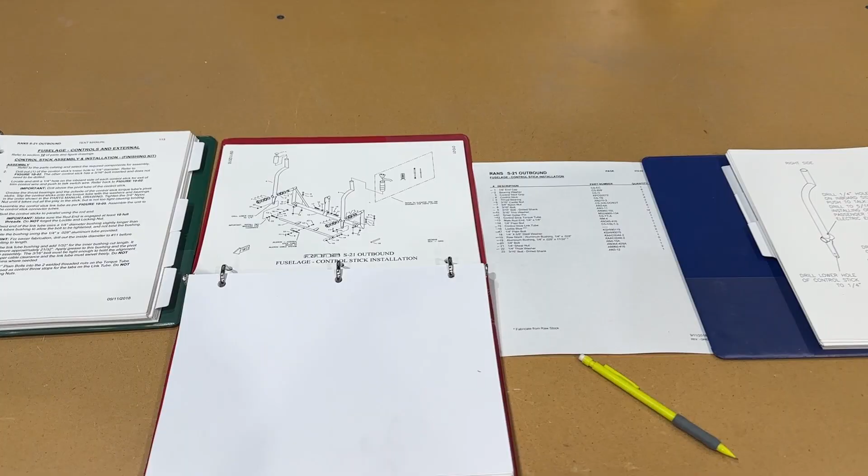Today I'm going to work on the control stick. I'll probably work on the rudder pedals too, but I'm going to start here with the control stick assembly. I've got my parts manual laid out, my text, and the figures manual. Looks like I'll have to reference a couple figures for this. I've gone through my parts listing and gathered up all my parts here.

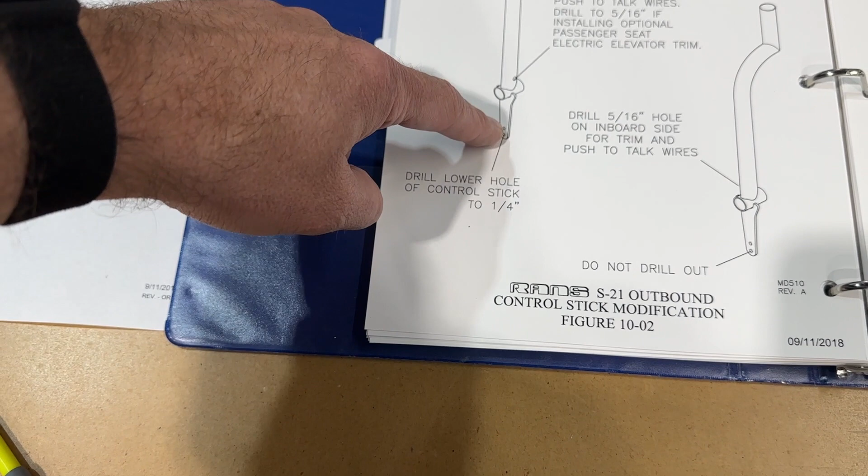So let's get started. First thing I'll be doing is drilling out the bottom hole here on one of the sticks to 1/4 inch. Leave the other one here, I don't drill it, that'll stay at 3/16.

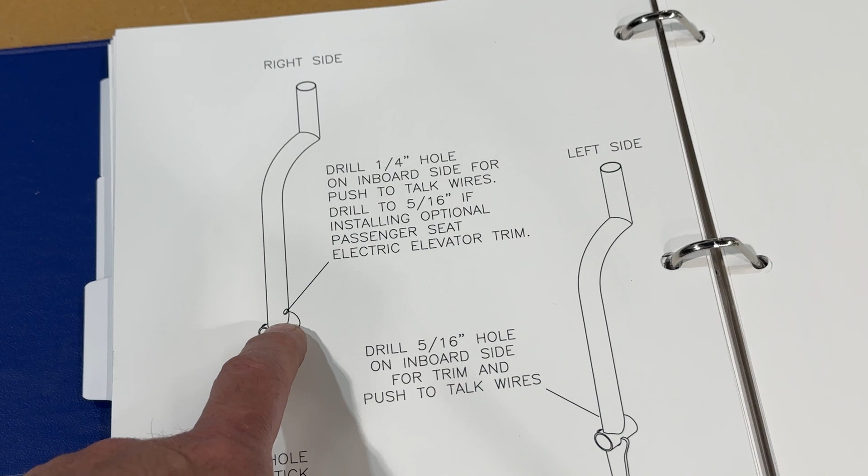Looking at the figure here, it says drill to 1/4 for push to talk wires, 5/16 if installing optional passenger seat electric elevator trim. So actually, I don't know if I'm doing passenger elevator trim yet, I may or may not, but I think I'll just open this up to 5/16 anyway. And of course this one will get 5/16.

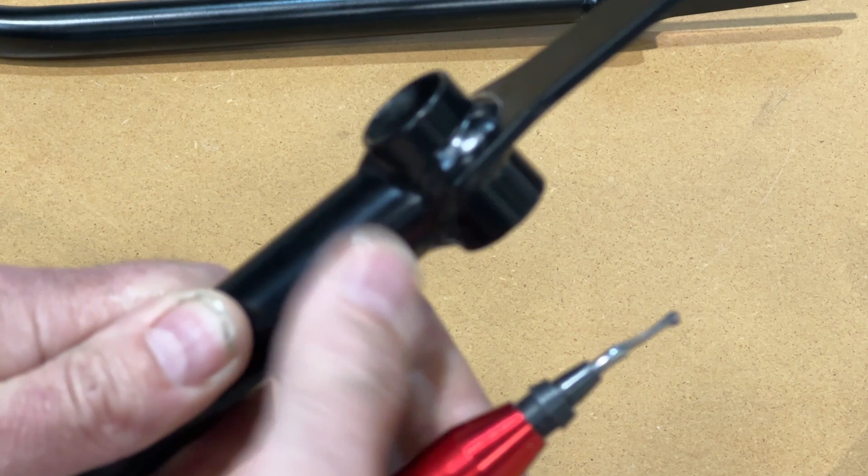Next, the manual calls for greasing up the thrust bearings and a little bit of grease on the shaft here, and then assembling the sticks onto the shaft with the thrust bearings and the bearing washer stack up accordingly, and then securing it with the 3/4 inch lock nut.

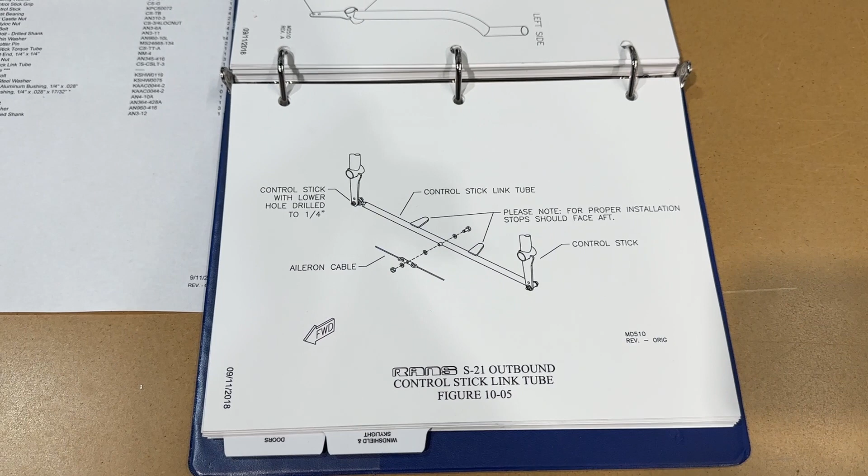Need to assemble the link tube next. Looks like it gets a rod end on one end here. There's a bushing, actually this shows better. There's a bushing, number 19, that inserts in there that I'll have to cut from raw stock. And then just a stack up of some bolts, washers, and nuts.

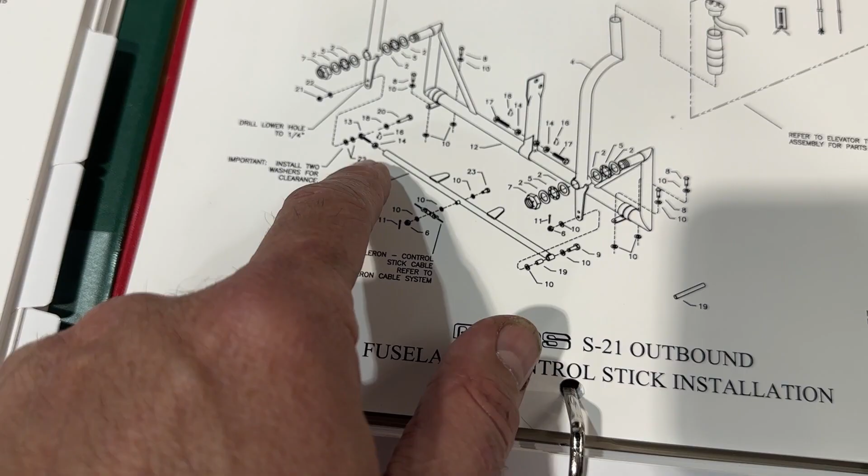The tube that's supposed to go in here to act as a bushing, even after I opened this up, I cleared it out with a 1/4 inch drill just to clear out the powder coat, and even then it's a tight fit. It would have to press in. So what I'll do is polish off just the end of this a little bit with some Scotch-Brite and just chuck it up in my drill.

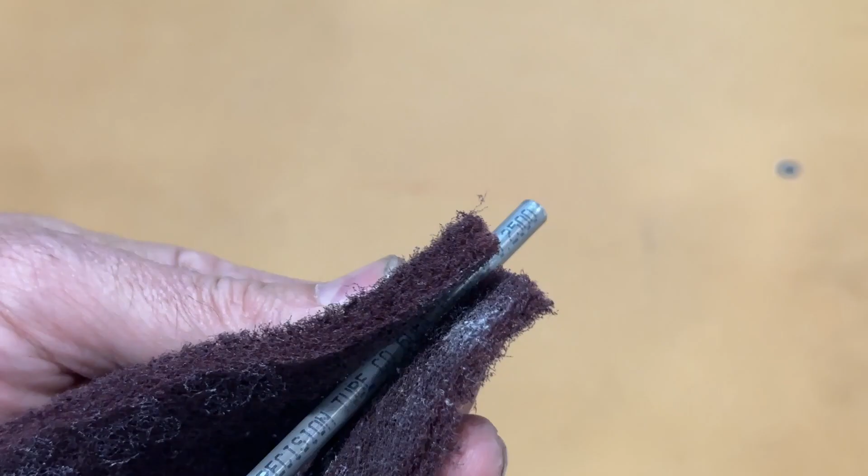And the bushing does get opened up to a number 11 for the inside diameter.

At this stage, the manual does call for installation of this into the fuselage. I will hold off on that as I'm going to build the rudder pedals next.

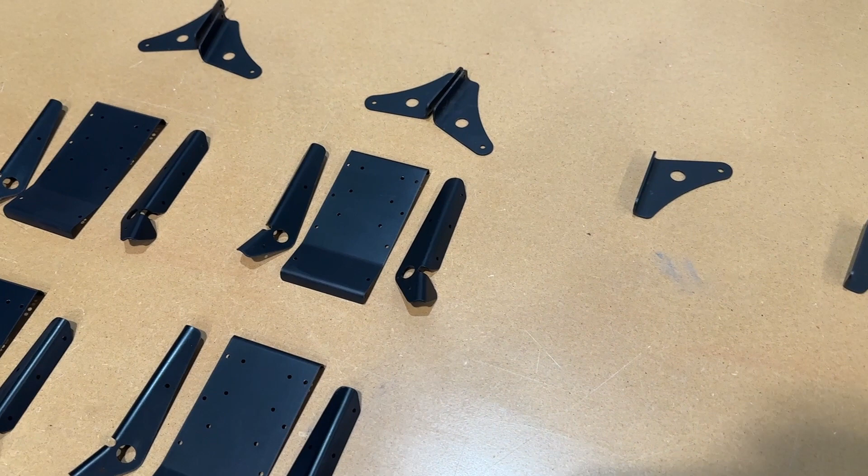Next up are the rudder pedal assemblies. Got all my parts laid out again, everything I'm going to need, with the exception of I am missing two of these. These are two lefts. I'm missing two rights. I have a set here, and I have half of a set, but I don't have the opposite sides for this, and that's not through the fault of RANS. The anodizing shop lost them, and I'm just now noticing, and unfortunately that's my bad for not doing a full inventory when I got my parts back from Anodize.

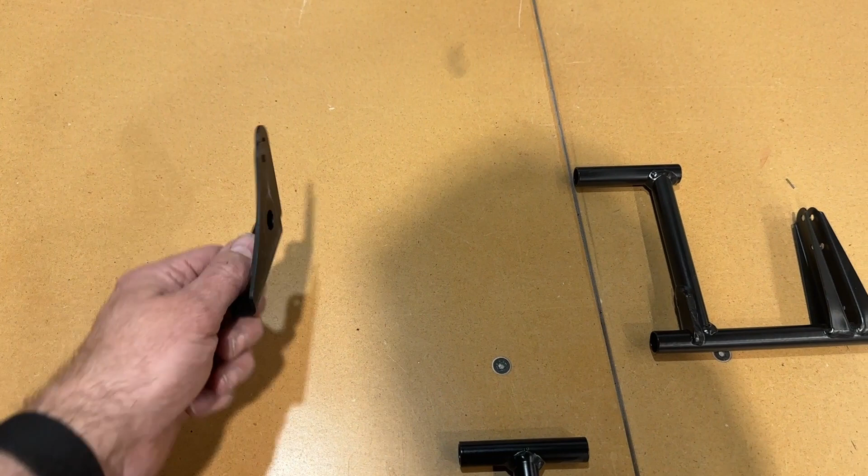I went through everything, I thought I had it all. Apparently I missed that they didn't have these, and of course I reached out to them and asked, hey, do you still have these? It's been 2 months. And they're like, no, we have no idea, of course. So I'm gonna have to order 2 more of the right side pieces of these from RANS, and I'll have to send those out for anodizing. So I won't be able to finish up 2 of the pedals fully, but I can do everything else and I can rivet them on later.

To get started, I'm gonna rivet these to these. So we get 3 rivets here on either side, and then there's a match drilling that happens for this hole into this tab here. And I think I'm gonna do solid rivets on these.

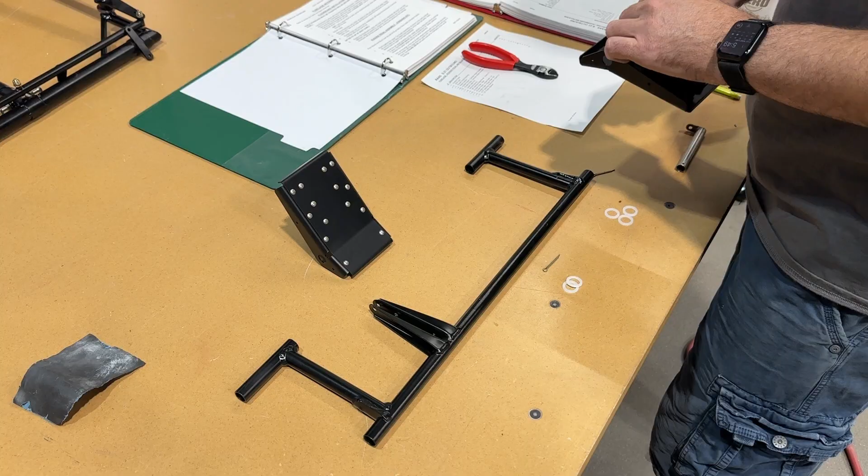The manual calls for a rivet here, a CCPQ 62. I'm gonna do a screw and a nut instead, just for ease of being able to, for whatever reason, take the rudder pedal off at a later time. You've got the cotter pin here, which is nice, you can pull the pin, but it still doesn't let you slide this out. And until you can slide this out, you can't remove the pedal.

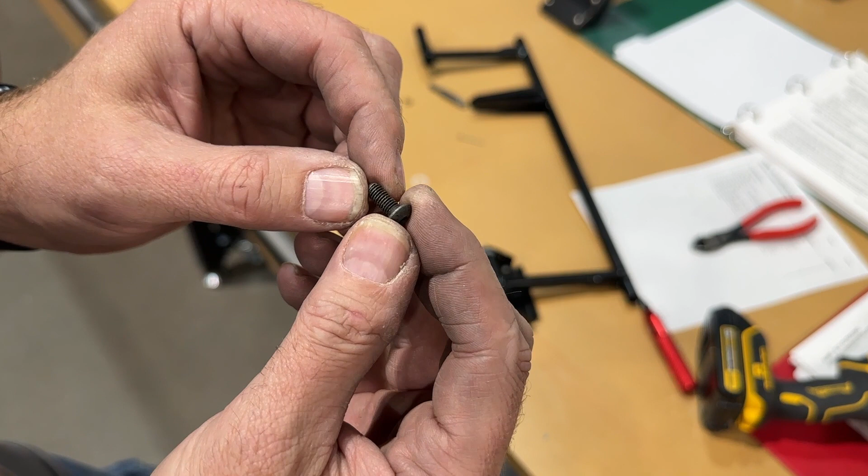So what I need is an AN3-3, that would work. But I don't have any, and I'm not going to order any for that. I'm just going to use some of my stuff we use on our robots here. I got a 5mm by 12, M5 by 12. Same diameter, basically, so it'll work just fine. So I've got that, and then a lock nut. This will be just fine.

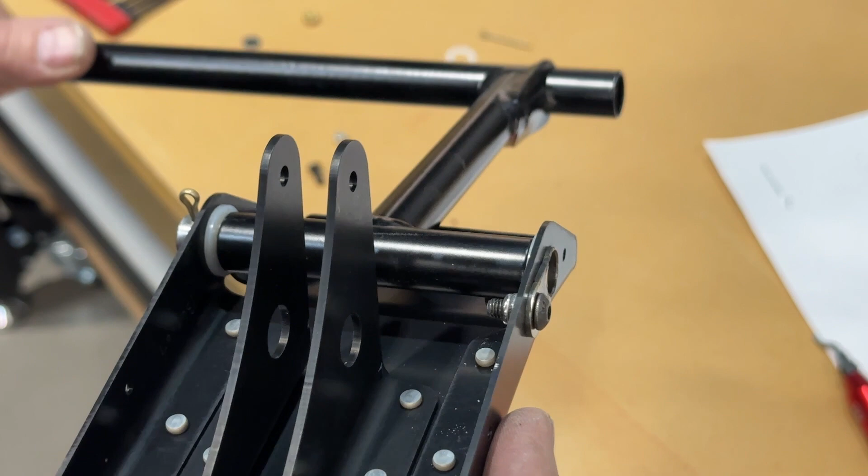That'll be just fine. There's no real shearing load here or tension, this is just to keep this shaft in place. That is the only purpose it serves, so this will be fully serviceable.

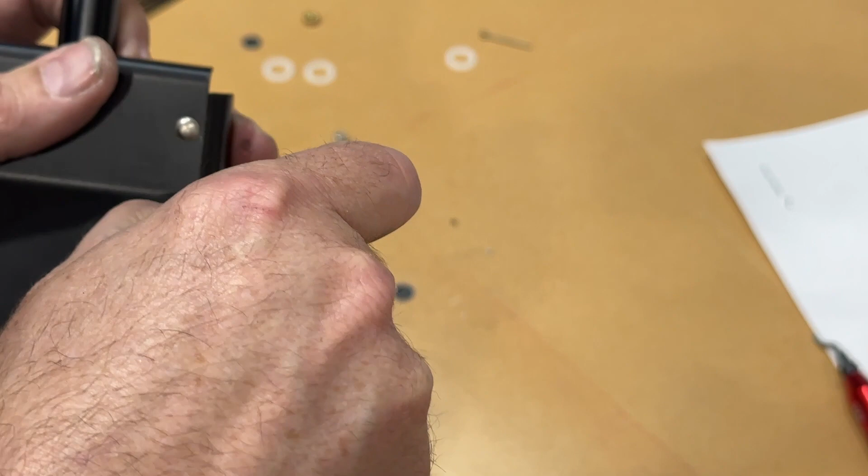Actually, I'm seeing something here. I'm going to flip this cotter pin around because the way it's clocked, I don't want the cotter pin facing my toes or my feet. Flip that around.

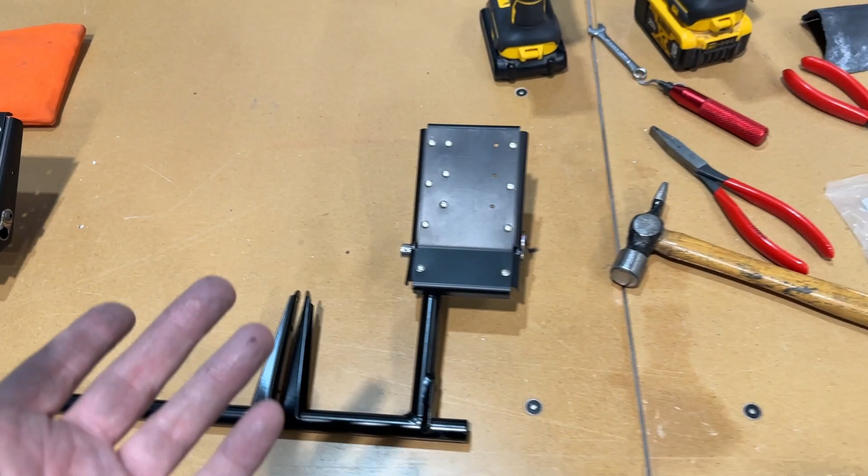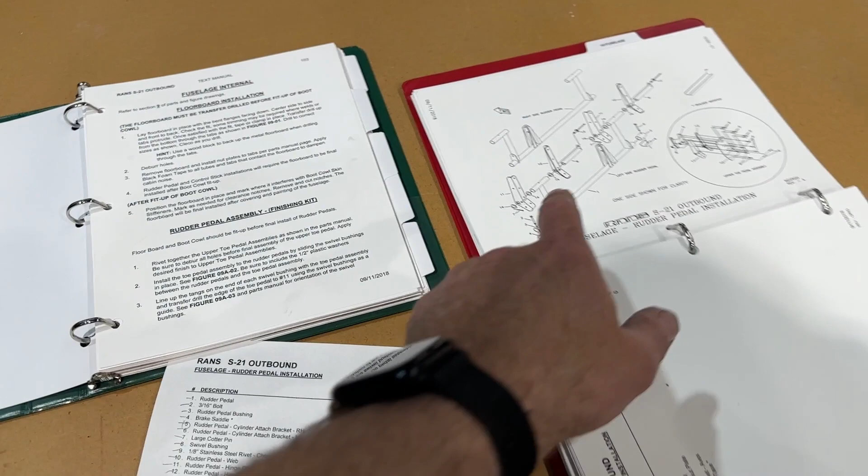There we go, just finished the left side here, and after I was done with this, I noticed that I may have wanted to flip the orientation or mirror the left side on the right side. I did the right side first, and I was just looking at the diagram here. Well, this is the left side, and you've got your axle pins.

What are they calling these? Swivel bushings. You've got your swivel bushings coming in from the right side on the left pedals, so I should have maybe come from the left side on the right pedals.

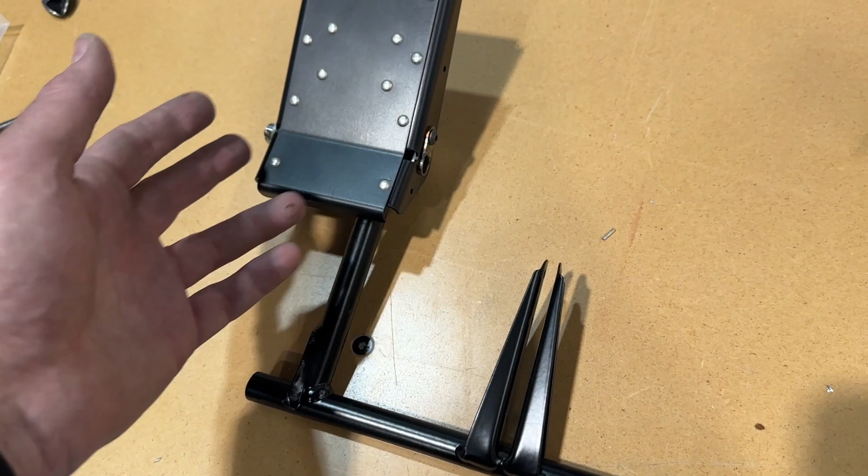No big deal, I didn't rivet these, so I could put them over here. The downside being I already drilled these holes here. I don't know if it'll matter. Either way, if I have to flip it, it won't matter that there's a hole here, but it may not matter that they're inserted from this direction anyway. So I'm just going to run with this for now. If I find it needs to be flipped over, I'll do that.

Kind of place these together how they'll go. And I'm looking at it, and I just don't see any reason why these need to be flipped, other than maybe for aesthetics. If it just bothered you that these weren't symmetrical, it doesn't really bother me.

Now I'll take this extrusion that they give you, and it gets cut to 1 1/8. Looks like four pieces, 4 pieces at 1 1/8.

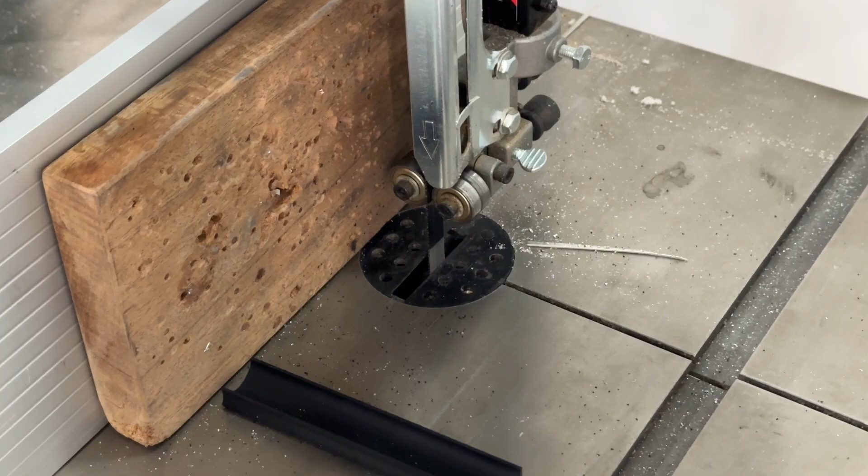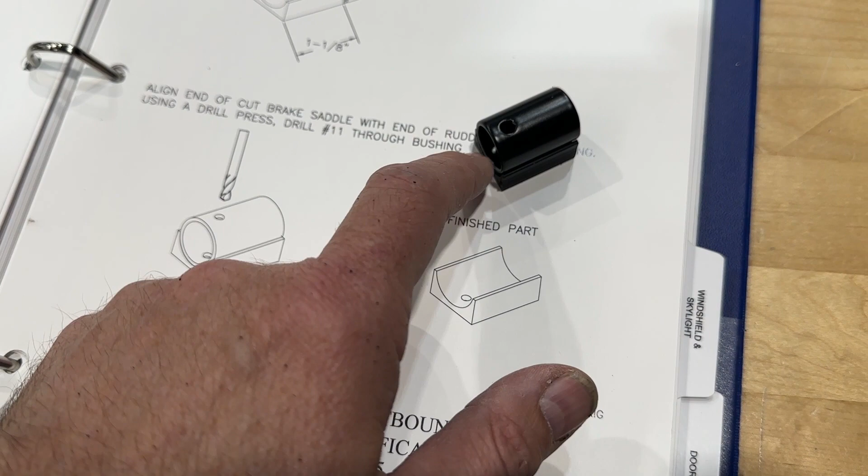All right, so now here's my part, here's my bushing. That'll sit there, flush it out on the end, and I'll run a drill, a number 11 drill, through that on all 4 pieces.

Well, I got these parts done here, so at this point, the only thing left to do is mount the rudder pedals into the airframe.

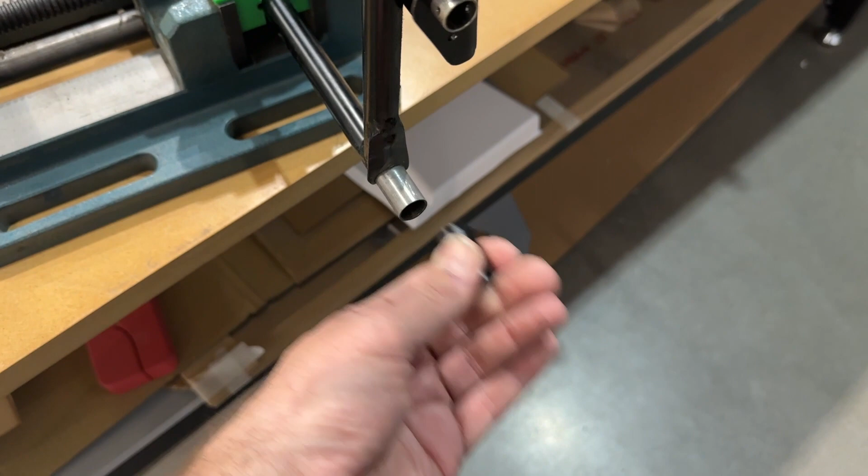So I tried to fit one of these bushings on here, and there was no way. All this powder coating on here and then powder coating on the inside of this, not a chance. So I did some emery cloth on the OD here, and a sanding drum was actually just the right fit to get in here and clean this out.

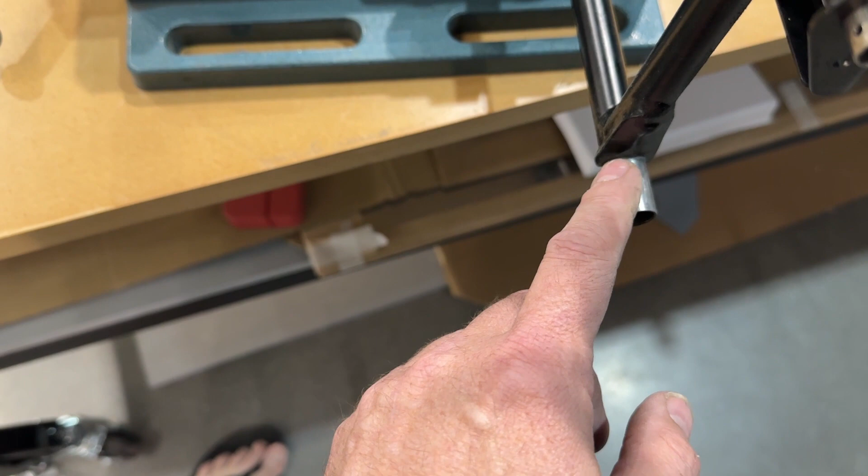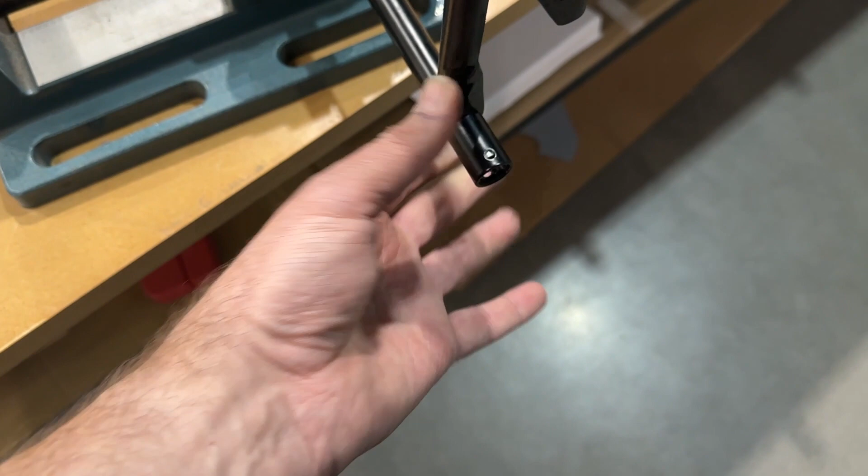A little disappointing. With powder coating, you can mask off areas. We do it here, and they could have easily had their powder coater mask off these outside surfaces here, and you can even mask off the inside surfaces. They put plugs in here, and then you only powder coat the surfaces that need it. But I don't know why they didn't do it. It's not a big deal, it's just more work, and it's just not as clean of a finish.

So anyways, I've got one done here, and I am going to do the other 3.

Fitting the left side rudder pedal bar in here, and I noticed these holes are set in the floorboard here for these screws, these AN3 bolts. They're already set at a fixed distance, and the tube, the rudder bar tube, was a little long.

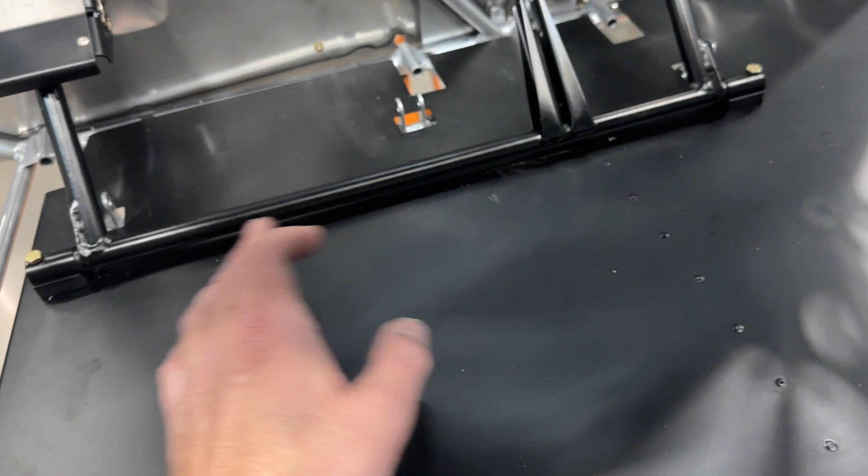It was about 1/8 of an inch too long, and I couldn't get this bolt in here once I had gotten this one in. So I just took it out, and on my disc sander I ground off a 1/16 inch on either side, polished up the ends again, and I did get it to fit, and I have no slop laterally there. It's a good fit.

Got those both in there. I did have to do the same thing on this bar. I had to take about a 1/16 inch off one end on this one. It didn't need quite as much, but I did get that to fit.

Something I think I'm going to do is, I don't know, I'm just not super fond of this arrangement here with this little plastic thing and then the steel tube bushing.

I'm going to draw up and engineer a single piece, just a solid piece out of some 6061, kind of a block that's integrated all in one, and I'll have those machined out. I'll probably do a video on that at some point. It's a pretty simple part, and I like it. I like that idea better than this.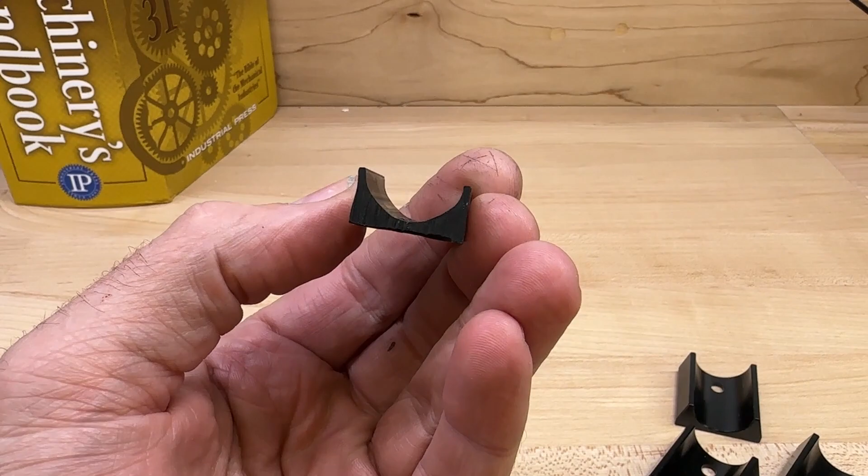This is the factory part - they send you a length of this, and you cut it down to size like we did, 1 1/8, I believe it was. But I wasn't quite satisfied with how it fit. So I drew these up and had these machined and anodized.

I decided to forego the solid piece design. In order to do that right, I would have had to press in a bronze bushing, so there was no steel to aluminum contact. A bronze bushing would act as a bearing, and probably an oilite bushing would have been good. But that just was really starting to overcomplicate what this assembly is all about. Doesn't need to be that fancy.

So I just decided on these saddles made from aluminum, and they have a little bit of a wider footprint, and the diameter is appropriate for those tubes with the powder coat buildup. These kind of spread out because of the buildup of the powder coat, and they're fine. It's, you know me, I just had to go with something different.

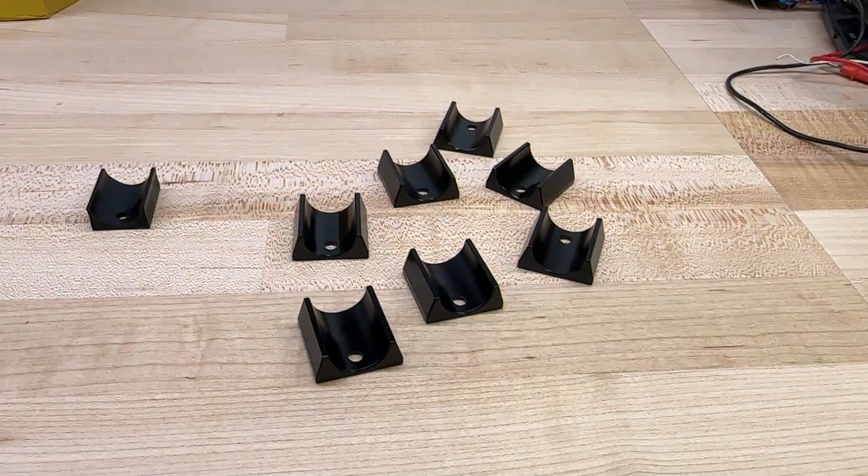So this is what I settled on. I'm happy with it, they turned out really nice. I'll show you what it looks like. Here we go. It's a little harder to see them now because it's been a couple of weeks and I've got the boot cowl skins temporarily put back on here, but here's what this piece looks like. I feel it's a little bit of a better piece than what they give you.

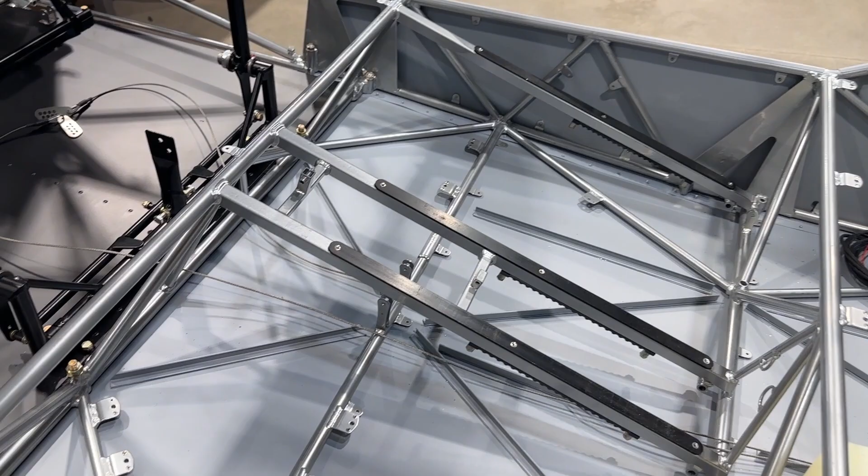I got the rudder cables run up here a little bit, just kind of starting to look and see what I need to do. Got some pulleys that I'll need to get out, some other hardware bits. Also, I'm going to need to do the rudder return upgrade that RANS has now.

Maybe I'll pull those parts out and at least start looking at what that's going to entail. I will have to drill a hole in the firewall, I believe, to mount the forward portion of that. The sticks will have to come out, no big deal there. I didn't really torque these bolts down, it's just kind of sitting in here. So I think I'm just going to maybe start working on some of those cabling things with the rudder return and these cables. It'll give me something to do here for the next little bit.

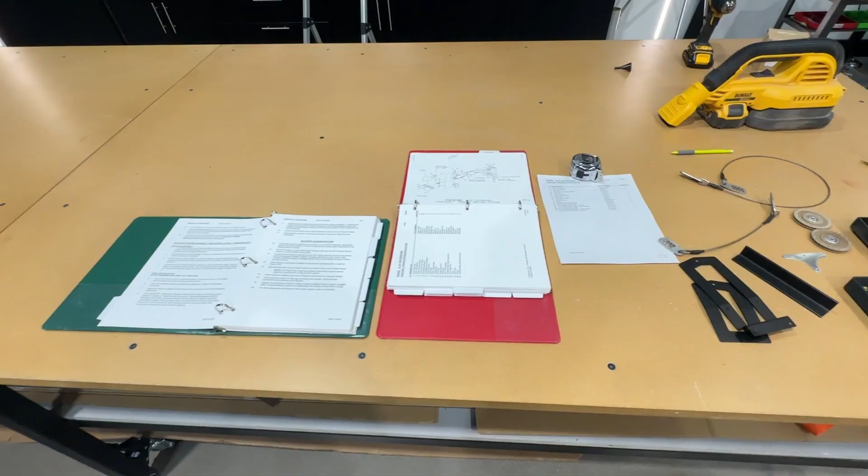I've gathered up my parts here for the rudder return system. That's what I'm going to start working on here. Got all the parts here that I need, got everything prepped, and it looks like it's pretty straightforward. Just a couple cables around some pulleys, some mounts, and voila, nothing to it.

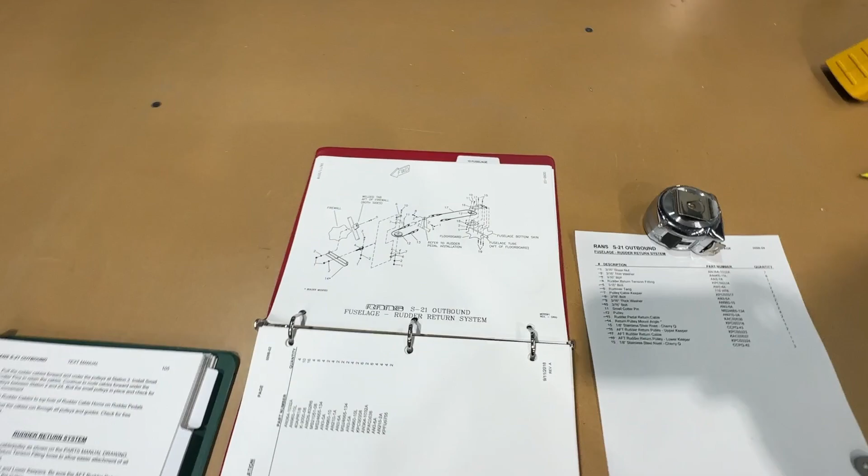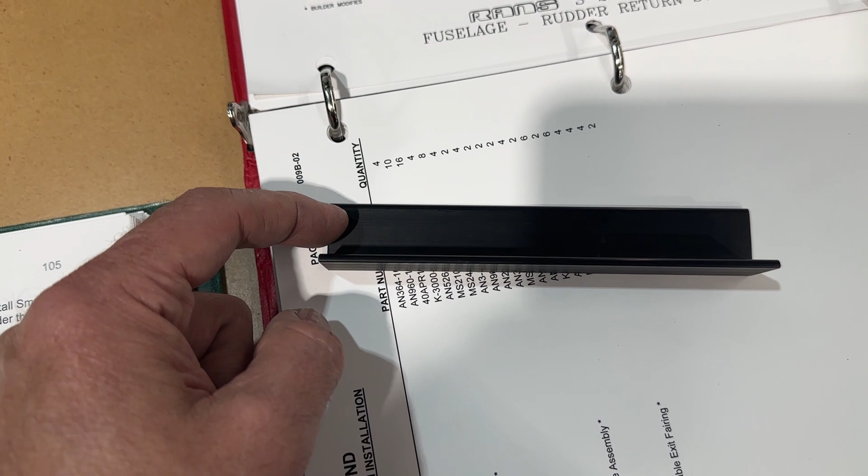First thing they'll have you do is install the forward cable pulley. As shown in the parts drawing, leave the rudder return tension fitting loose to allow for easier attachment. So this is this angle piece here, number 14. They don't drill it for you in the 3 positions. It looks like definitely one gets put in the center, and then they don't really say on the ends - whatever a nominal edge clearance is going to be is what I'll do. And then looks like it mounts to some tabs on the fuselage cage through the firewall into some tabs there. So I'll start with getting this marked up and drilled.

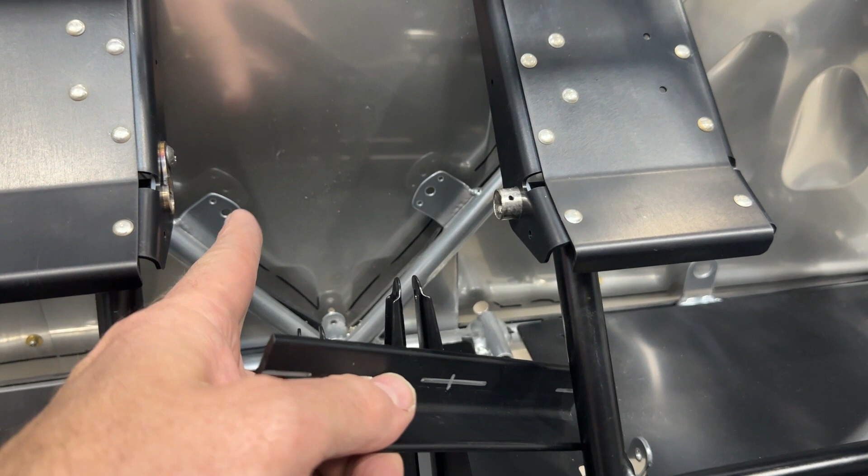After looking at it a little closer, I see what's going on here. These 2 tabs is what it's going through, so that distance center to center is fixed. That is what it is.

I'll put a hole in the center here, which is what I've got marked. I tried to measure it from the backside here, from the inside, and couldn't get an accurate measurement. So I think what I'm going to do is pull the firewall off. I just have it clecoed on right now. That'll let me strike a measurement more accurately center to center here, and then I can transfer that to this piece.

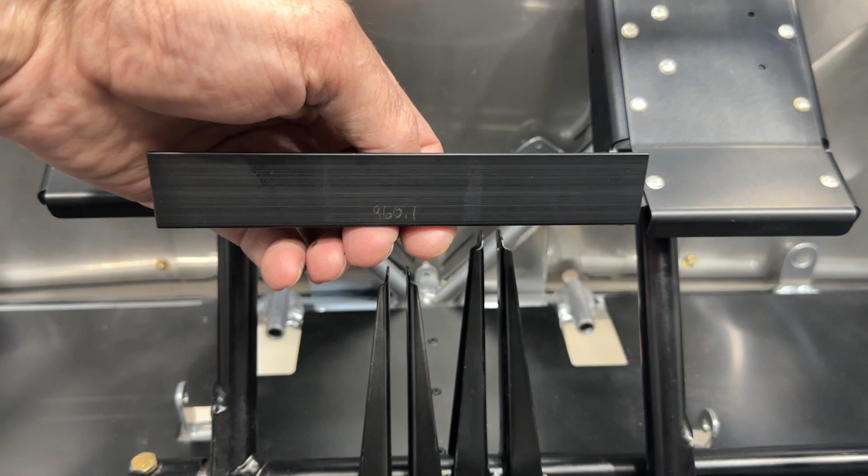It'll sit like this in front of the firewall. All right, let's see here.

Looks like it is 3 15/16. Glad I did this, because when I tried to measure it from the backside, I was coming up with 3 3/4, and I couldn't get the tape in there close enough, so I was trying to eyeball it.

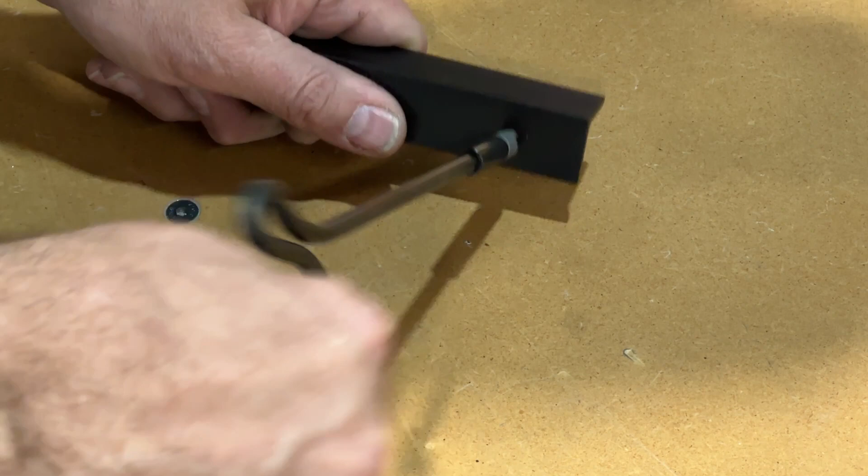Firewall back on, so now I can go ahead and transfer drill through those tabs. I'm gonna use one of my long bits for that, so I can clear all this pedal stuff.

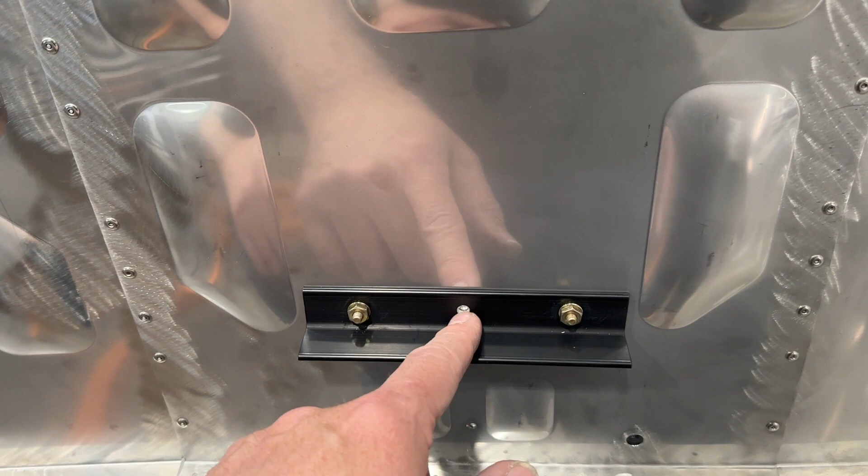Temporarily got this piece mounted here. I just used some plain nuts. I'm gonna have to pull it off and deburr this hole here once I match drill it, which is what I'm gonna do next. I'm gonna match drill through here for the center.

But one thing I noticed, it's not a big deal, but those tabs are not horizontal, so this plate runs at an angle. It's just that my eye catches it. Not a big deal. Had I known prior, I would have offset these holes.

I would have run this hole up a little bit and that one down, and I could have split the difference and probably got this thing sitting horizontal. But it's really no big deal. All right, I'm gonna get that match drilled.

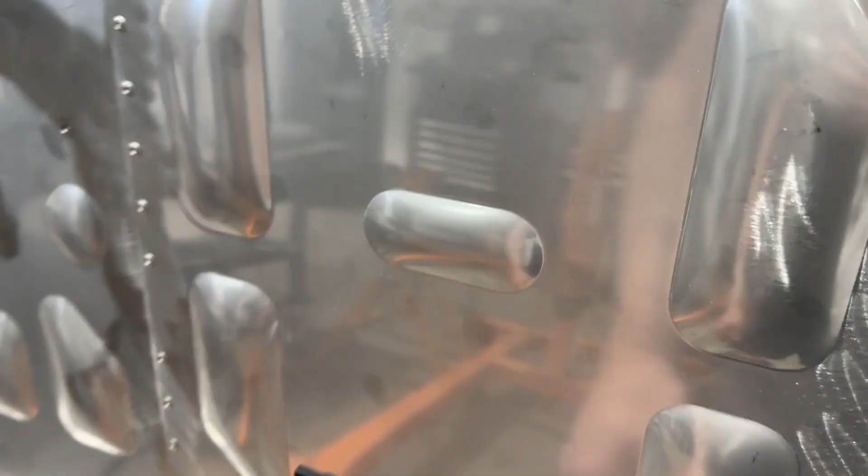I got this piece in here. Just have it kind of loose fit in there. That ultimately gets tensioned up when all the cables are finally installed.

Well, after looking at it, I couldn't accept it. It was driving me nuts. So what I did was I took the angle piece off and I milled slots in it.

I milled this slot up about 120 thousandths, 150 thousandths, and I milled this one down the same, and that let me clock this to where this was level. The hole remained unchanged because it just kind of pivoted around the center there.

So when this all gets tightened down and all three get in here, it's not going to move, but at least it's level. I was just dreading that because that's going to be visible for a long time until I get my cowling on, and I don't want people coming around here and looking at that and thinking I drilled that at the wrong angle.

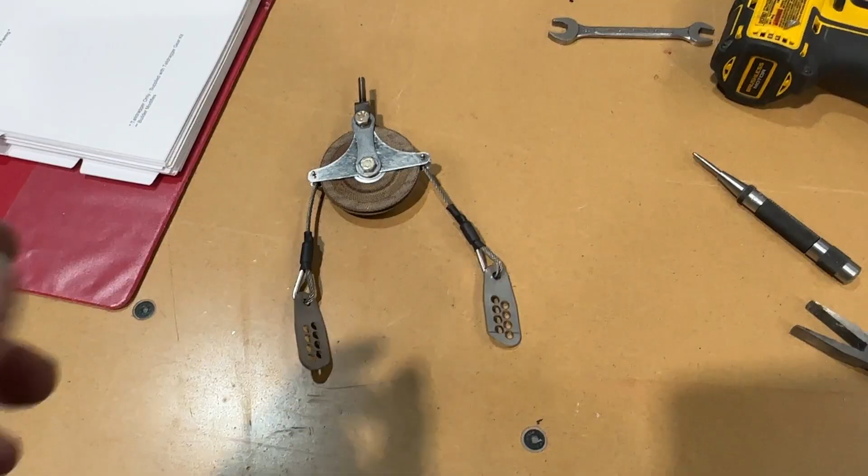So there we go, I got her fixed. Got this assembly fabricated here. This is basically this setup here.

We got the tang, retainer, pulley, and then the reverse retainer and tang there. And that all connects to this link. So this will now go in the firewall,

in that hole there, like so. And I'll go ahead and put that nut in, washer back on here. Again, I'm just using plain nuts right now, kind of while I'm figuring this stuff out. And about like so.

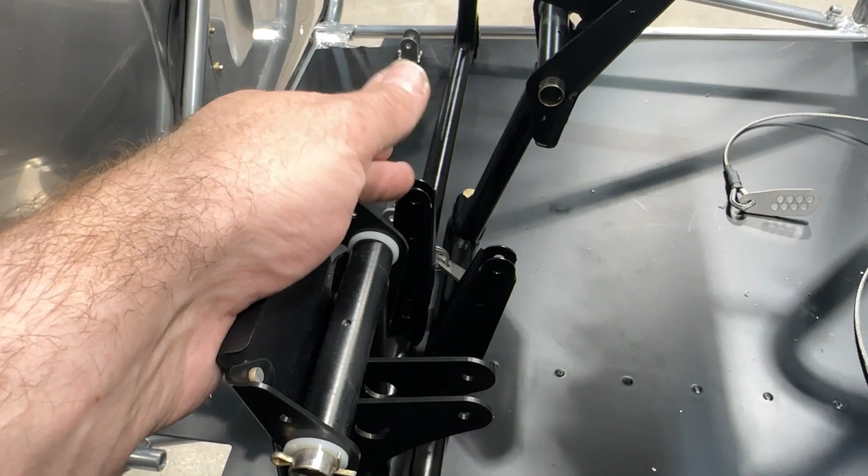And now these tangs will get attached to these arms here on the rudder bars, along with these tangs here for the rudder cables. That one and that one.

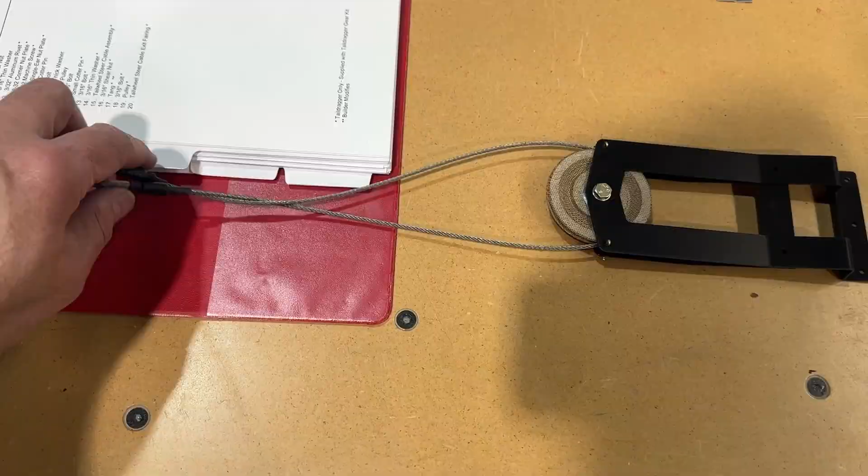Here's the aft piece. These two aluminum parts here, pulley, cotter pins, cable. Here's where this piece is going to go. It will go here. Now it's supposed to get riveted to the floorboard skin, and also 2 rivets here.

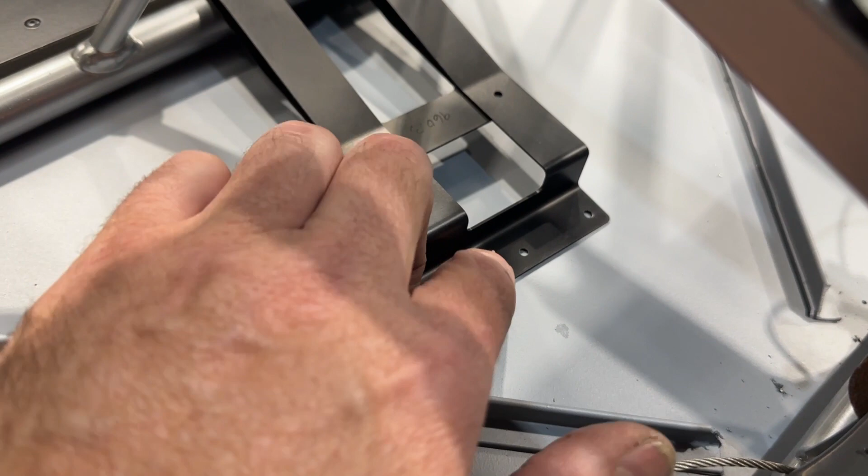Derek at CMDPK, another YouTube S-21 builder, had made a comment on one of my previous videos when I did the forward floor here. He said that what he did was he put nut plates here so that he could screw it up from the bottom.

And what that does is that makes this removable. It makes the floor removable, so you can just unbolt your pedals, unbolt your stick, and the floor can come out. If you rivet it, then you got to be drilling out rivets and stuff to get your floor out.

And I'm still really early in this build, and I don't know if I'm going to have to pull the floor out later on for servicing.

It might be nice to be able to do that. I really like that idea, and I'm going to do that. I'm going to rivet in some nut plates here. Derek also mentioned, hey, you're probably going to have to drill out some of those rivets on this stiffener that I put in. This is not a factory stiffener here. I put that in, and I do have 2 rivets here that would have bumped into the bottom of this piece here. So I drilled those out, and once I fit this, I'll match drill through here and rivet this to the floor. This can rivet to the floor, that's fine, and then the whole thing can just come out if I can unscrew it with nut plates there, if that makes any sense. Really like that idea, so I'm glad Derek reached out and made that comment. That's going to be really helpful for me.

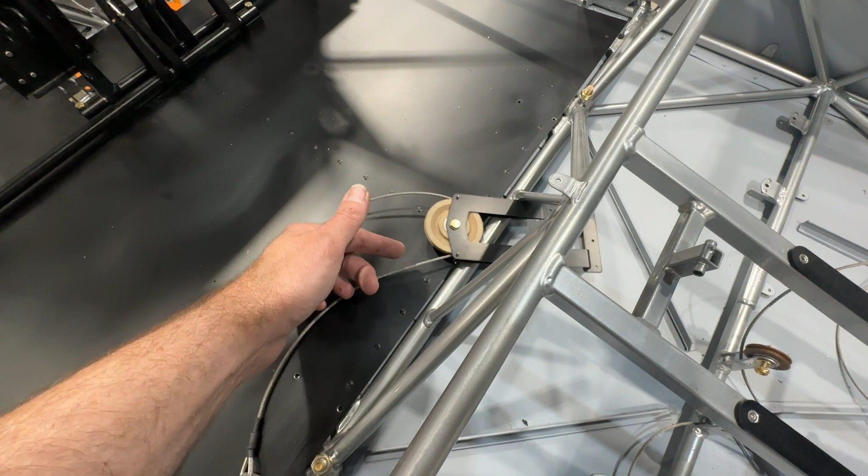But I can see how all this is working. It's pretty simple. Then these cables are going to come up here and attach to this, and basically it just creates a continuous loop so that if you're pushing both feet on the pedals at the same time, you're not putting all that strain on the rudder horn and on the rudder hinges and all that assembly. You're putting it on this piece here, being that it's a continuous loop. So pretty neat upgrade that they came up with.

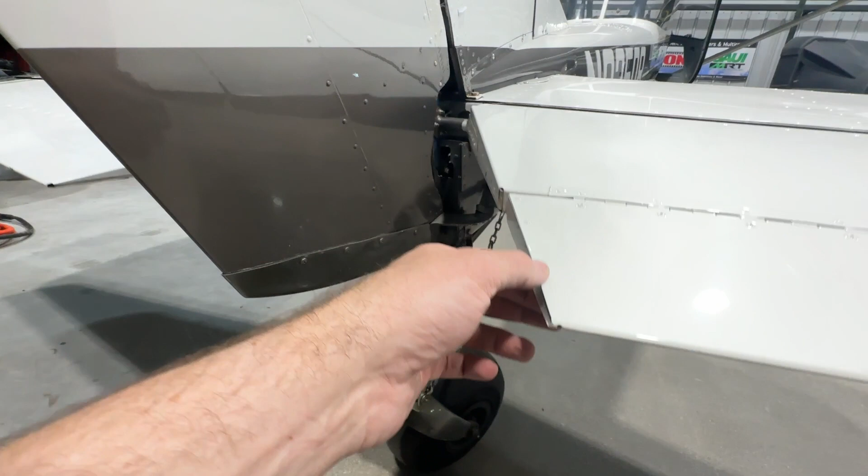I wish my Cessna had that, because that's one thing I don't like. If I stand on both pedals, when I'm hitting the brakes primarily is when you're going to have a lot of pressure on both pedals. The rudder horn, in fact, let's take a look at it. I know this is not S-21 related, but in a way it kind of is. On this one, the rudder horn is outside the aircraft, and you can see those, one cable goes up here, attaches to this horn, and one goes to the other. And if you look, they're at an angle. When you apply your brakes really hard and you're kind of pushing on both pedals, this rudder horn will flex. And I've noticed it, I've felt it, I can feel it in my feet. And something like that would be a really nice upgrade for a 150 tail dragger.

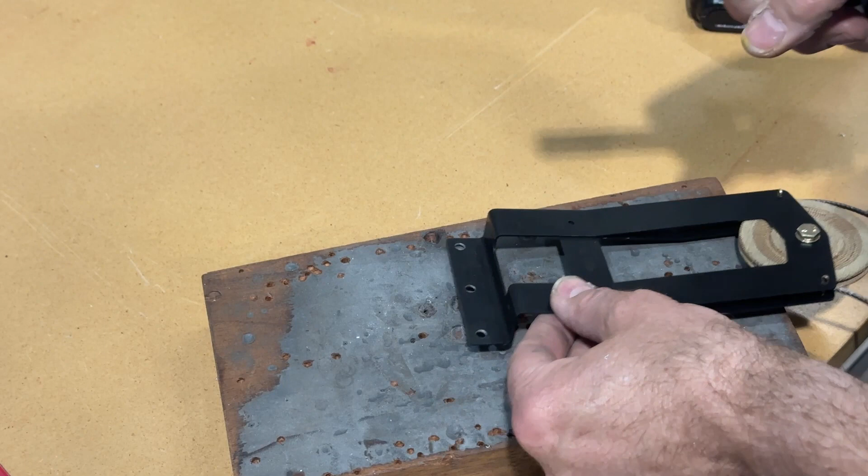But anyhow, that's what I'm going to do. So I'm going to look and see what kind of nut plates. Probably I'll do some number 8s, I think would be fine. I'll see if I've got some. All right, I've got these drilled out to number 11s. Got my nut plate jig here. And I'm going to drill these out.

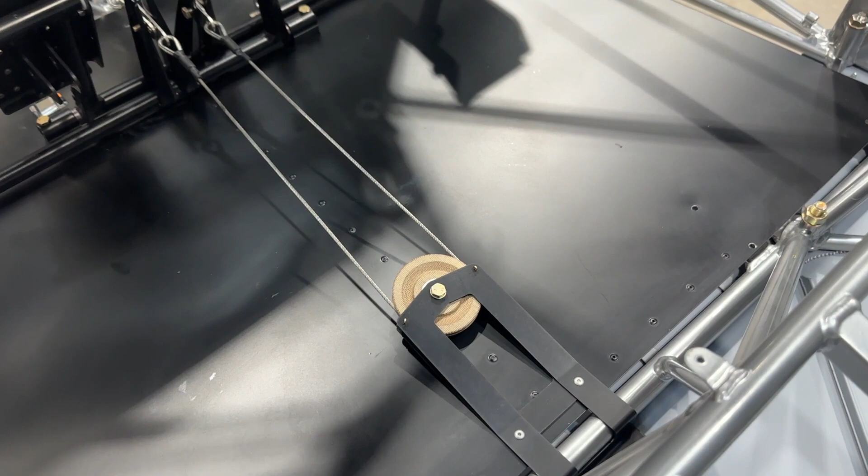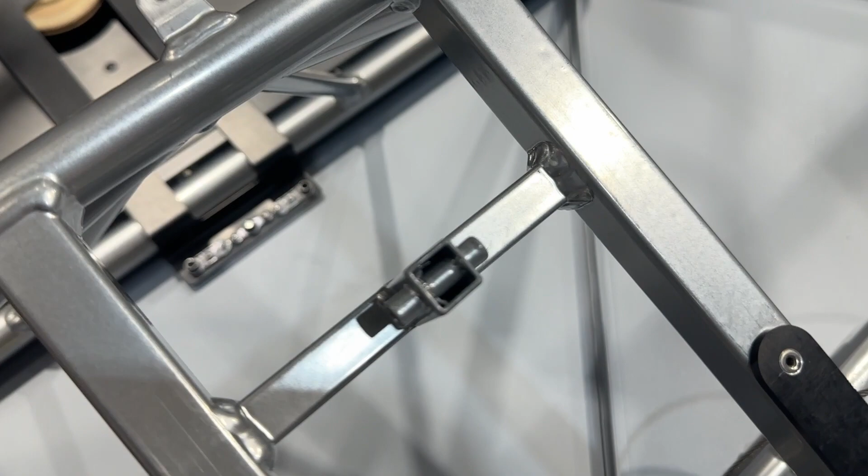There we go, I'll get these deburred. Oh, there we go, I got this riveted to the floorboard. That turned out fine, match drilled these 3 nut plate holes through this skin. I currently have just one, you can see just one screw in here just to kind of cinch it down. And that worked, so there you go. This kind of creates your continuous loop.

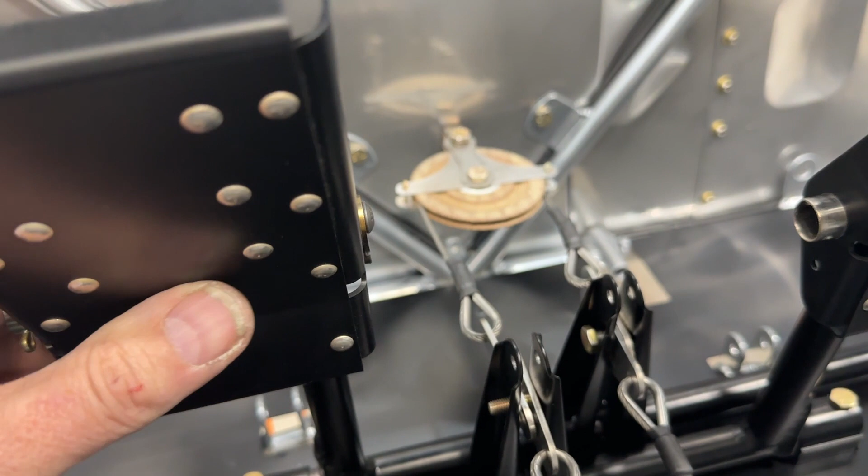One thing I'm seeing is the Nicopresses here and the heat shrink covering are getting close to the pulley. That may be a non-issue because it may be that the rudder stops happen right before then anyway. That can be adjusted a little bit. I can maybe pull that pulley forward by tightening this screw and using maybe one tang or one hole in the tang back, I don't know. I'll see. But there we go, this is done.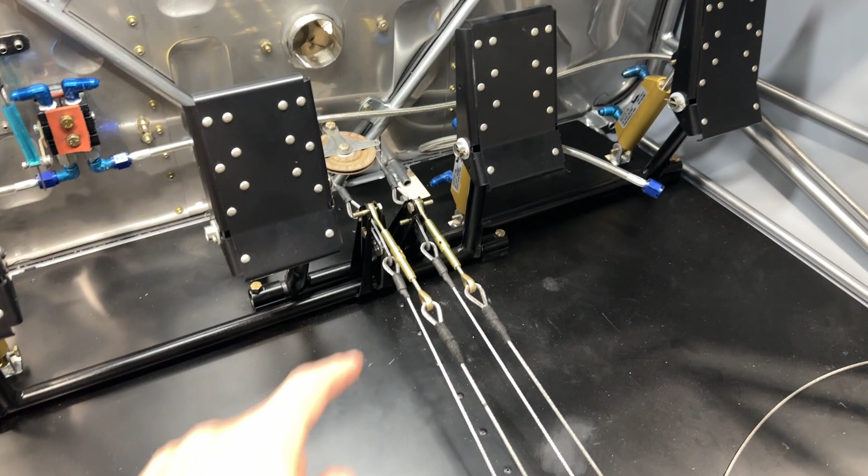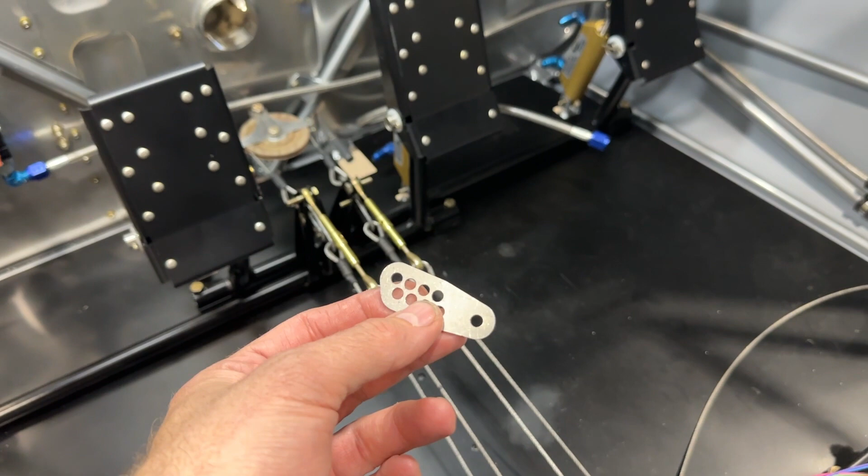Well, it's been a couple days since the last clip you just saw, and I was editing this together, and during that process I just started thinking more and more about something. I really wasn't satisfied with the tangs that they have, these adjustable tangs. I couldn't get what I felt to be a good tension on the rudder cables, and also a good tension on the rudder return cable, while at the same time centering the rudder when the pedals were level. When I would bring the pedals level and I would get the tension the way I thought it was good, the rudder was sitting about 5 degrees off to one side. And so I thought, well, let me try just moving over. You know, they've got these adjustments. So you've got half hole adjustments if you go the next row up or down, and you got entire hole adjustments if you stay on the same row.

Even at a half adjustment or a hole adjustment, it was either getting too much tension, or I would get the rudder centered up and the pedal centered, but then the rudder return was slack. The purpose of the rudder return cable is to keep tension off the rudder horn, so you want that tensioned a little bit, but you also want your control cables tensioned. There's a fine balance, I feel, with getting everything tuned just right.

You can notice in the last minute and a half of me talking, I have made a change. I have put turnbuckles in here. I did pin eyes for this end, cable eyes for this end. These are dash-16S, the dash-16 short turnbuckles. I just like the idea of using an aircraft turnbuckle that is fully tunable.

In this manner, I was able to get everything set up just right. I've got my rudder centered up. Well, it isn't right now, but if I center that up and come across here, all my pedals are in line, and I've got equal tension, good tension here, good tension here. These are adjustable. Actually these are probably a little loose, but I can give each one a turn to tighten those up. This lets me get that fine balance between having the rudder return just right to do its job, without putting a lot of force on the rudder horn when you're stepping on both pedals at the same time.

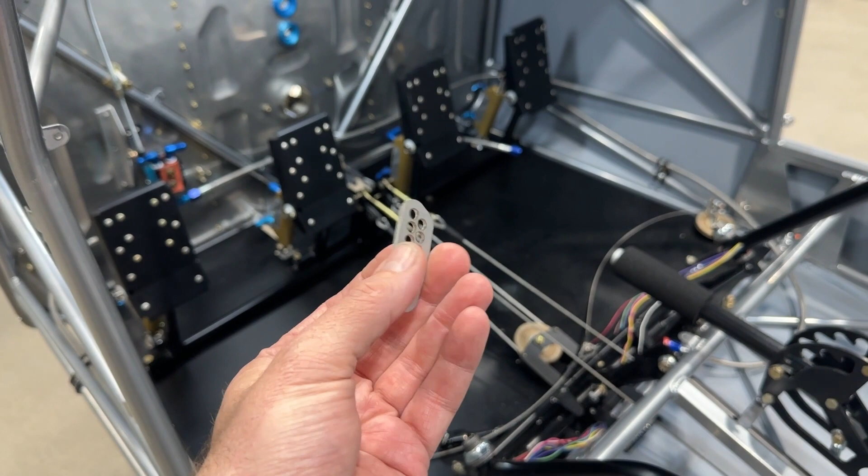It's a neat idea what they do with these, and I'm sure it works, right? Because there's a lot of these out there flying with it. But if you really want to fine tune it, then this is what you'd want to do.

I am considering, I haven't decided yet, but I did buy an extra turnbuckle. Grab it here, this one has cable eyes on both ends, and I'm considering remaking this one and putting a turnbuckle right here so I can tune that rudder return loop. And if I did that, I would get away from the two-piece tangs here. I would just do a single-piece tang, three-hole. It would come through this one, the cable here, the hole would go through the rudder bar, and then this hole would go to this cable, and it would just be a single piece with an adjustable turnbuckle.

Haven't decided on that yet. Maybe, we'll see. It will require me to remake this cable entirely, and this one as well, but no big deal, they're really easy to make. So there you go, for whatever that's worth.

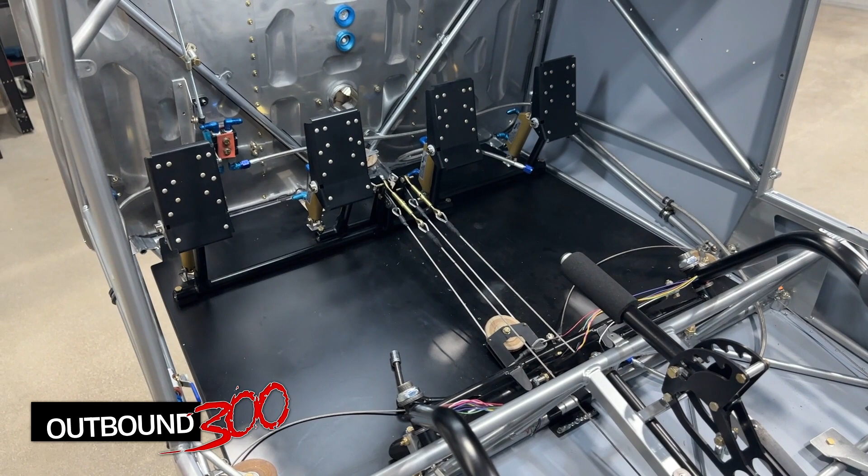Now keep in mind, if you wanted to do this, there is just barely enough cable with the factory length cables to make this happen. It's very close. Close enough that if you were going to do this, I would start way back before these cables are even installed and just make new ones, dealing with your own cable that way, because trying to work with the cable you have with a little bit left over and trying to Nicopress that was a little tricky, but in the end it all worked out great.

I'm a little disappointed, you may have noticed I forgot to put heat shrink before I crimped. Now this all gets covered up anyway, so it's not like you're going to be rubbing your ankles against it or anything, but what I just did is use some of my BMW fabric tape. Works really good and should probably be okay.

But there we go, I now have rudder cable turnbuckles for full adjustability.